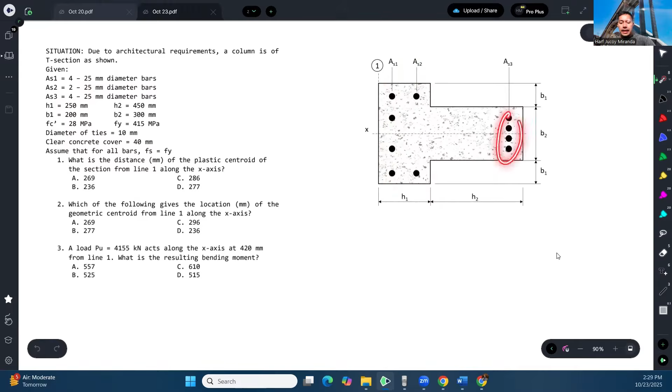We are given the following: AS1 is 4-25mm diameter bars. So our AS1 is this, four bars each 25mm. For AS2, there are two bars each 25mm. Then AS3 has four bars each 25mm. In short, all the bars are 25mm.

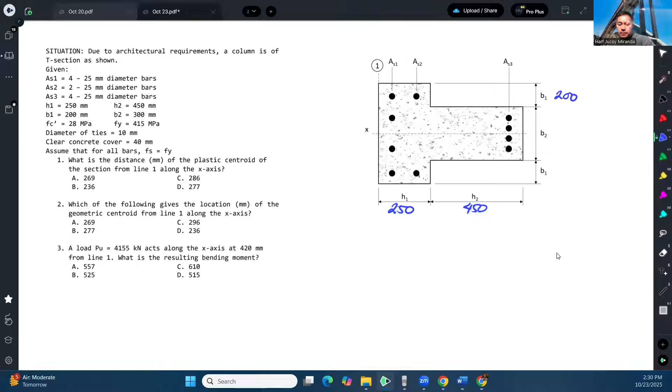And then we are given the following dimensions: H1 is 250mm, H2 is 450mm, B1 is 200mm, and B2 is 300mm.

FC prime and FY are both given. Diameter of ties is 10mm, and clear concrete cover is 40mm. Assume that for all bars, Fs is equal to Fy, or in other words, assume that all bars yield.

So the first question: what is the distance of the plastic centroid of the section from line 1 along the x-axis? So we're asked, what is the distance of the plastic centroid of this section.

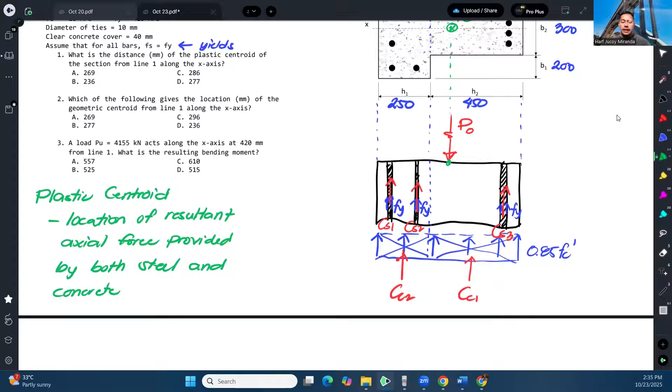Alright, and to find that, we just need to define its location - from where? From line 1. So we need to find this. Let's call it X bar, or the plastic centroid, XP.

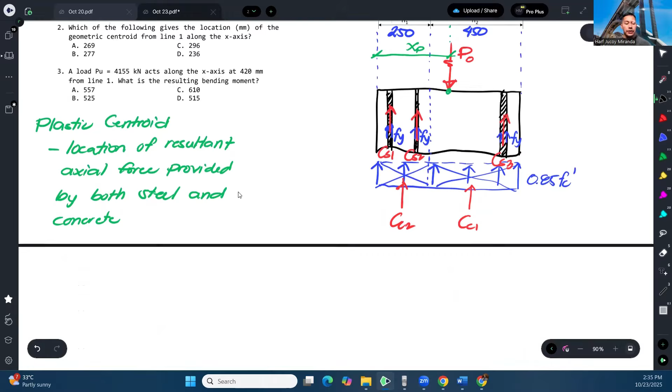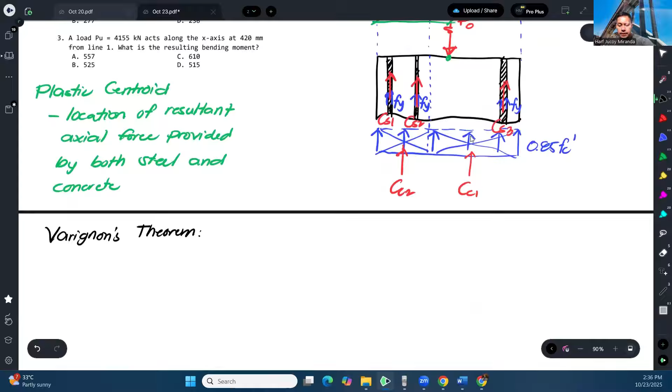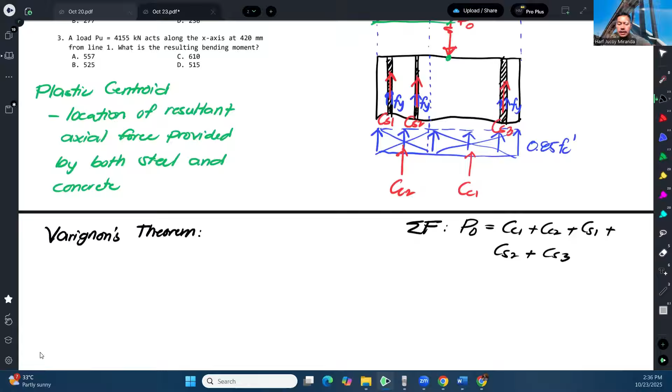To solve for that, we will apply the most commonly used theorem in civil engineering - Varignon's theorem. So we will apply summation of moments, since this PO will be the resultant of all of this. So first, when you sum forces, PO will equal CC1 plus CC2, CS1 plus CS2 plus CS3. That's PO. Now, applying Varignon's theorem, the moment of PO should equal the sum of the moments of its components.

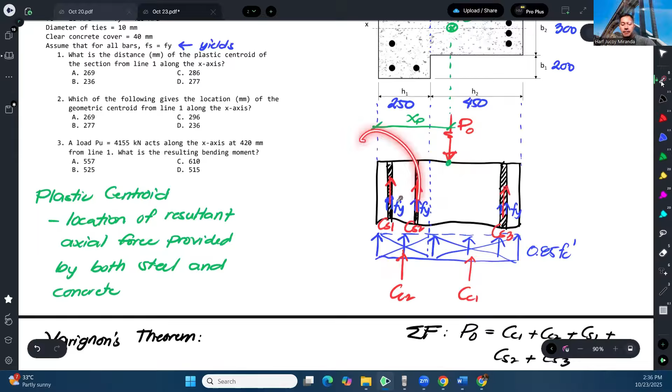So PO times X bar equals CS1 times its moment arm, plus others. What is the moment arm of CS1 from the left? This is a bit tricky because we have to know the location of this. The location can be defined using the concrete cover and the ties - I mean, rather, the ties. The ties are here, and there are also ties here.

So yung distance na to can be defined by, tawagin natin to na x1. Yung x1 natin can be defined by yung concrete cover plus diameter ng stirrup plus half ng bar diameter. So yung x1 natin ay 40 yung clear cover, yung diameter ng stirrups ay 10, tapos yung bar diameter natin is 25, so half lang ng 25. That will give us 62.5.

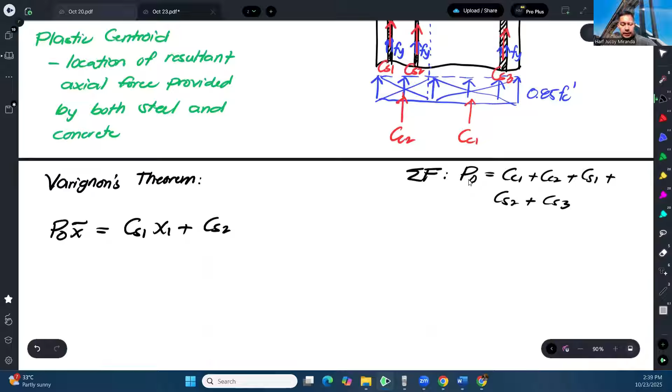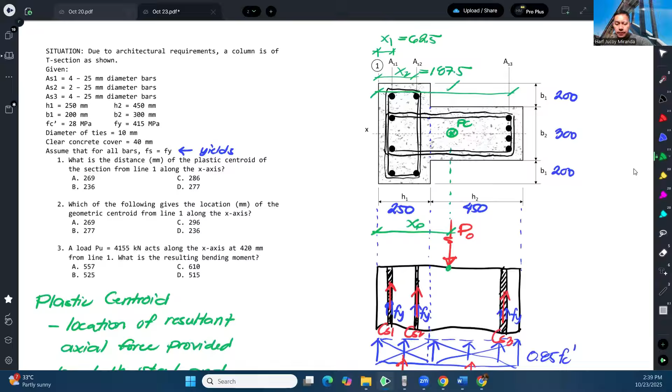So that is x2 plus CS3. For CS3, ano naman yung location nito? Ito naman, x3. Kagaya kanina, dahil ito ay nasa dulo, so ito ulit ay concrete cover minus diameter ng stirrups minus half ng bar diameter, which is again mula dito hanggang dito is 62.5. Ibig sabihin, mula dito hanggang kabila is just 250 plus 450 minus 62.5, and that would give us 637.5.

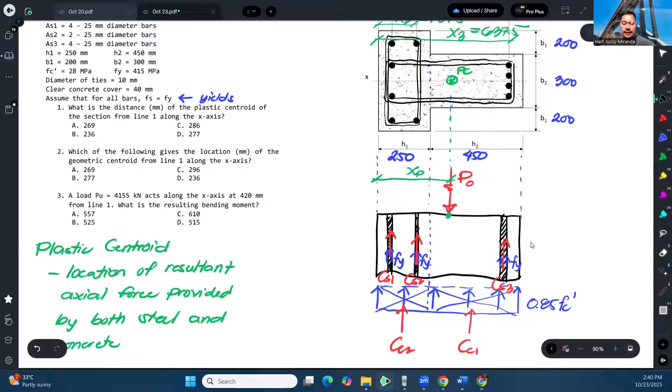So that will be our moment arm for CS2. And then we have our CC. Unahin ko muna yung CC2. Kay CC2 is just going to be at the centroid of this rectangle, which is nasa half lang ng 250. Plus, ano naman yung sa CC1. Ang moment arm naman ni CC1 ay 250 plus, kasi di ba ang centroid nito nasa gitna ulit, so nasa gitna ng 450. Basically it's 250 plus half ng 450.

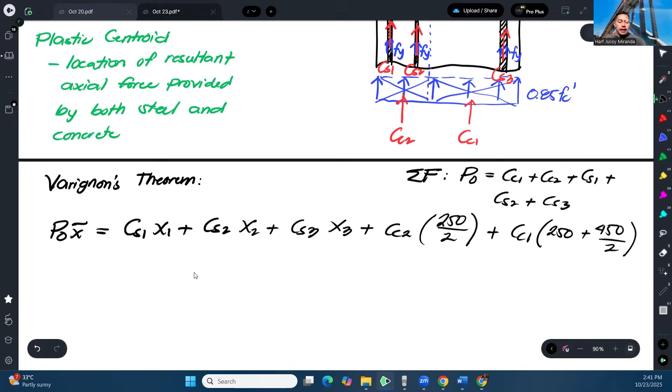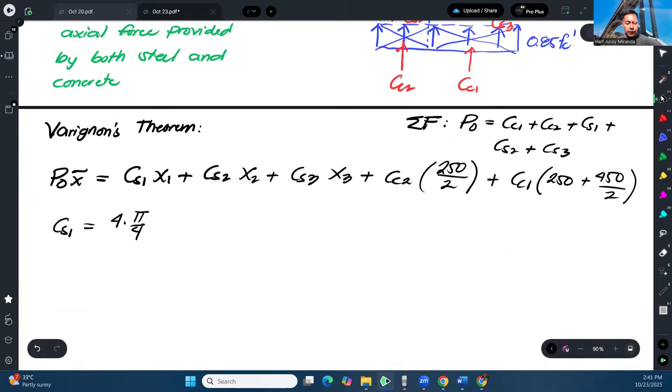So ganyan, okay? Ilista lang natin dito sa baba ano yung CS1. Ang CS1 is basically area ng steel times yung Fy. Ang area ng steel ay 4 na tig to 25, so 4 times pi over 4 times 25 squared times Fy. Ang Fy na binigay ay 415. Ang CS2, ang pinagkaiba niya lang, dalawa lang yung bakal niya. Ang CS3, same lang kay CS1, hindi ko nasusulat kasi 4 din yung bar di ba? And then kay CC2 or CC1, ba inuna ko?

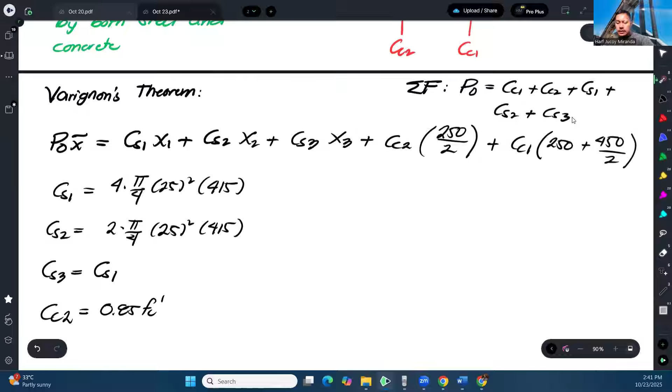CC2. Ang CC2 ay 0.85 Fc prime tapos yung area na to. Ano yung area na yan? So this is 200 plus 200 plus 300, that's 700. So actually 700 by 250 yung area na yan. And then CC1, 0.85 Fc prime times yung area naman na to, which is just 450 by 300.

Okay, so yun yung mga forces natin. From there, we can solve for x bar. Solving for x bar, ang gagawin lang naman natin dito guys, eto di-divide mo doon. Tapos ang value nito is yung sum lang nito mga to. Okay, gawin natin.

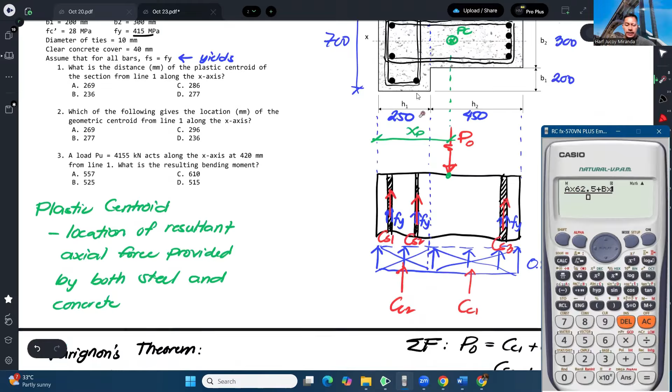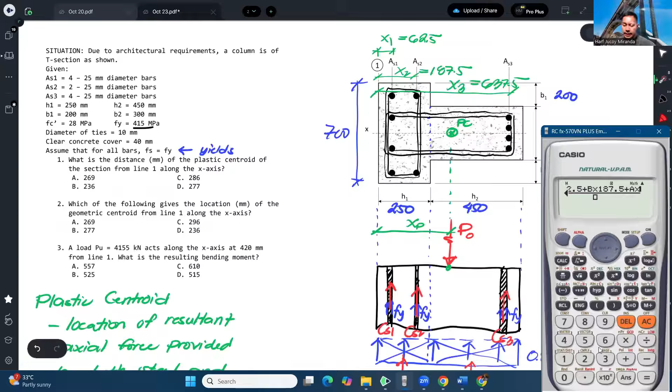Bali, we will have CS1. Lagay ko lang yung CS1 sa A, tapos yung x1 is 62.5. Tapos lagay ko sa B yung CS2, ang moment arm niya x2 ay 187.5. Plus, actually yung CS3 same lang sa CS2 - I mean, yung CS3 ay same lang sa CS1 rather. Tapos yung moment arm natin na x3 ay 637.5. Plus, ilagay ko sa D yung CC2.

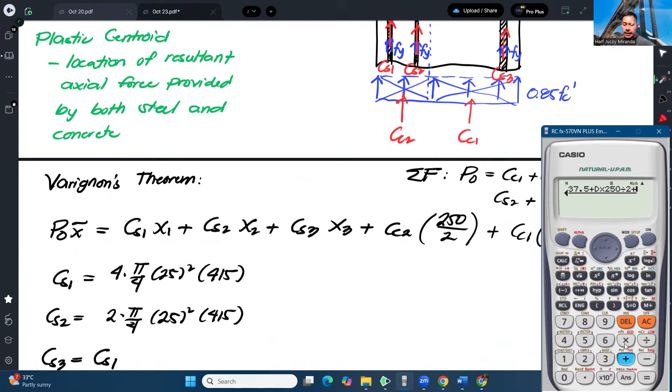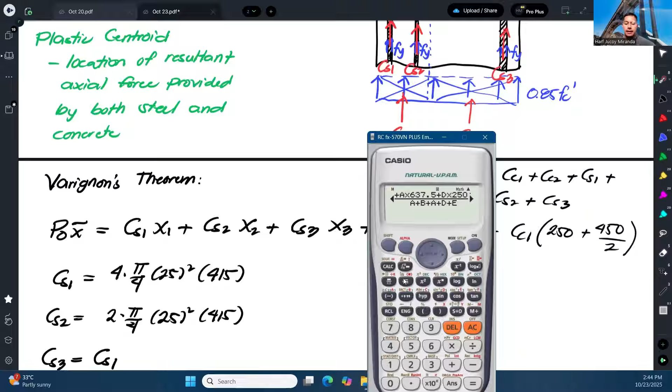Moment arm is 250 over 2. Plus, lagay ko sa CC1 yung E, na ang moment arm ay 250 plus 450 over 2. Over A plus B plus A ulit kasi CS1 plus, may CS3 pa tayo, plus D plus E. Press calc. Yung una, yung A ay pi. Magka-cancel lang kasi itong 4 over 4, no? Hindi ko na ita-type. Yung B, ito, dalawang pi over 4 times 25 squared times Fy.

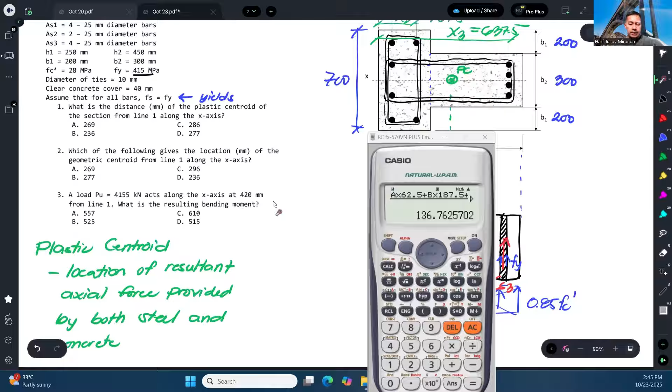Tapos yung D, ito, CC, saan ko ba yan? CC2 yung inuna ko, no? 0.85 Fc prime, 28 megapascals, tapos 700 by 250. And then 0.85 Fc prime, 450 by 300. Okay, and that should give us our x bar, no? However, malayo yung sagot natin. Pero double check lang natin yung values, baka meron lang ako na dito na overlook.

So let me just recalculate. Pi, 415. Yung B, and then yung D, yung E, so ganun talaga. So let me just double check the moment arm. Yung A is 62.5, yung B 187.5, 637.5.

And then this 250 over 2 yung E 250. Ah okay, ito pala, dito ako nagkamali. 250 plus pala to, not minus. Okay na, ayan. So that should give us 278.65.